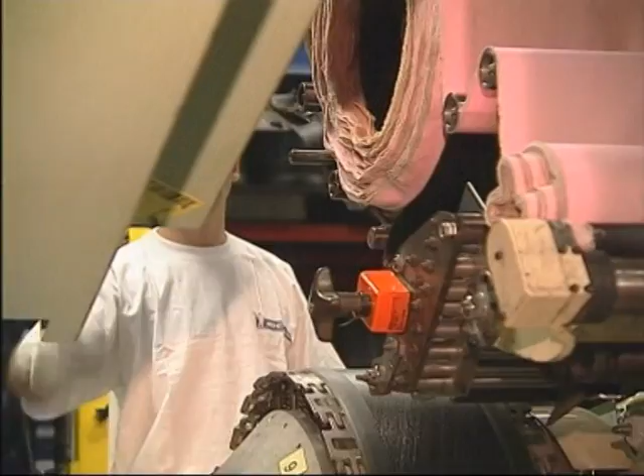A tyre is a complex assembly of many elements, implementing a wide variety of raw materials. The composition of the rubber compounds varies within a single tyre. Each compound is carefully developed to meet the requirements in terms of flexibility, resistance, grip, etc. Long lengths of metal and synthetic cable are also used.

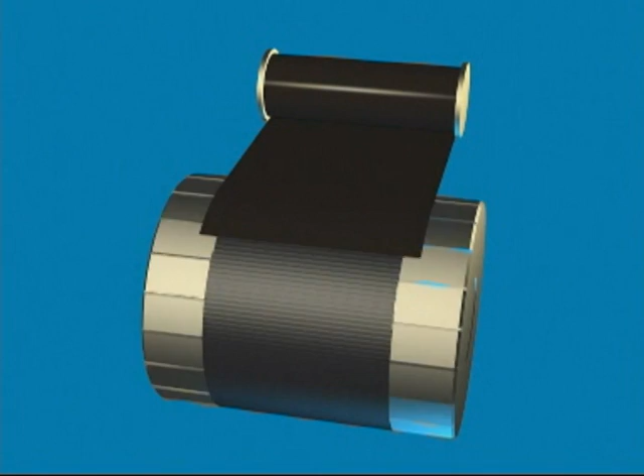Manufacture is performed on the drum, a rotating cylinder whose central flexible section can be inflated for reasons which we will see later. The first element applied to the drum is a sheet of airtight synthetic rubber. This layer replaces the inner tube in today's tyres.

In a second stage, a ply made of textile cords sheathed in rubber is then added. This network of cables will form a reinforcement radiating around the tyre. It is the radial carcass.

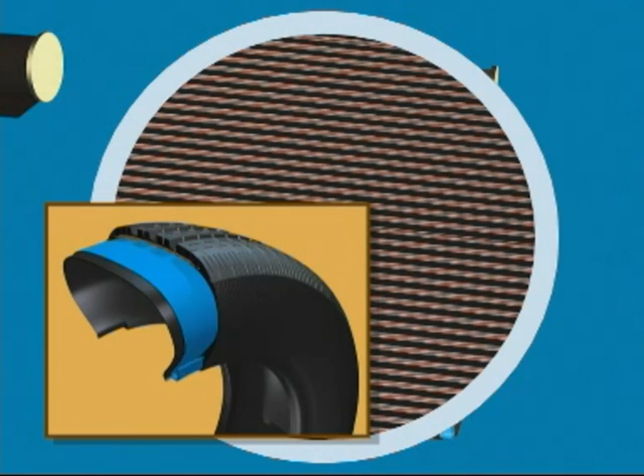Braced against strips of profiled rubber, two high-resistance metal cable hoops are installed. These are the bead wires. They will hold the tyre on the rim. The casing ply is folded over the beads to anchor it.

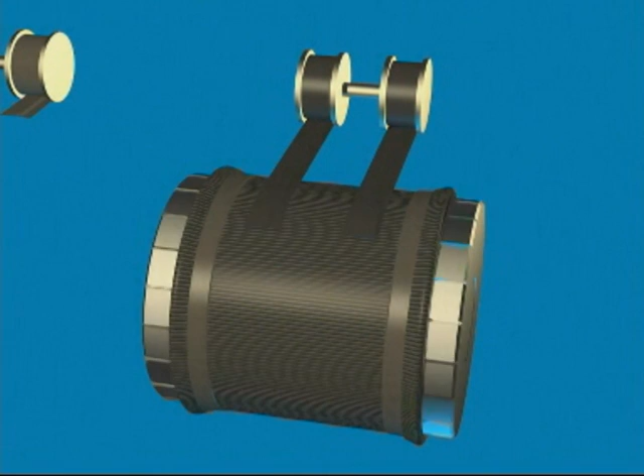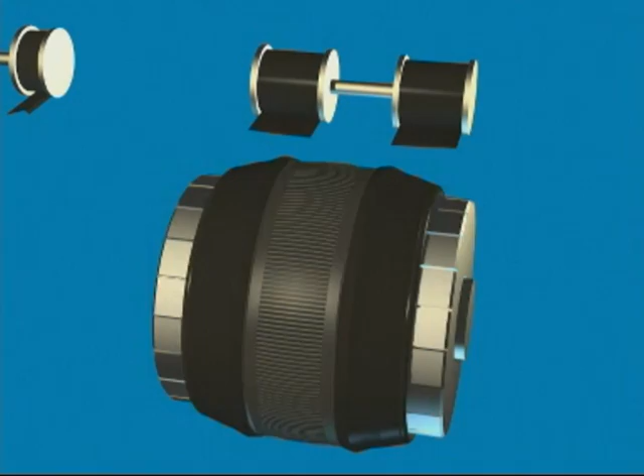Other elements are added. The sidewalls, made of flexible, resistant rubber, will protect the tyre from lateral damage. The tyre is then shaped by inflating the central section of the drum.

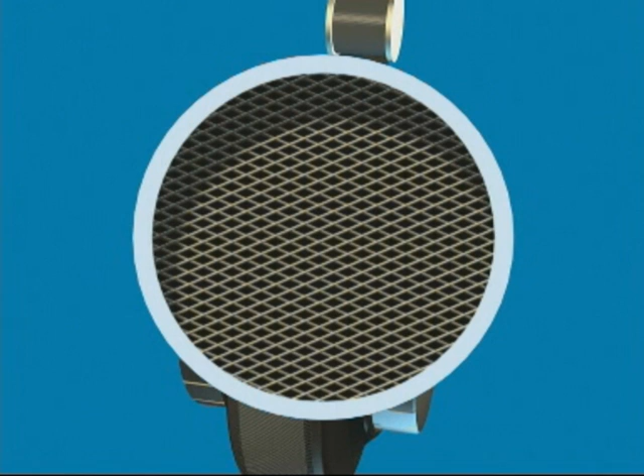Two plies are applied to the crown of the tyre. They are reinforced with metal wire arranged obliquely and, with the casing ply, form a network of triangles to limit the deformations of the tyre. Finally, the tread is fitted, the part of the tyre in contact with the ground.

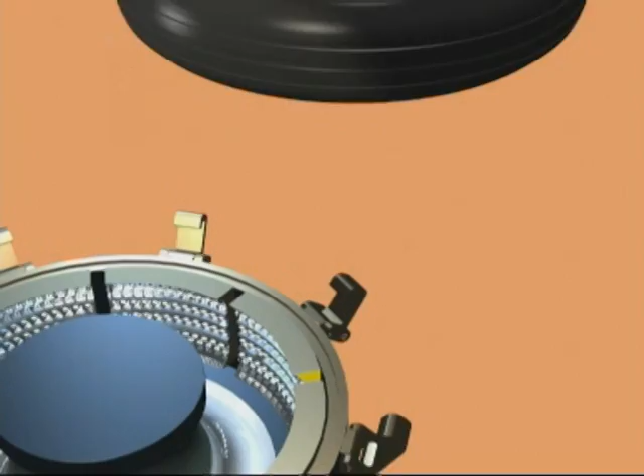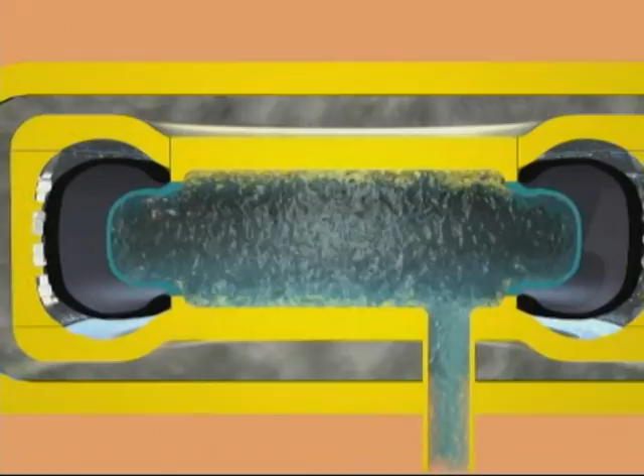The tyre blank can then be installed in the curing mould. In the centre, a bladder filled with pressurized hot water pushes the still malleable material to the base of the patterns engraved in the mould.

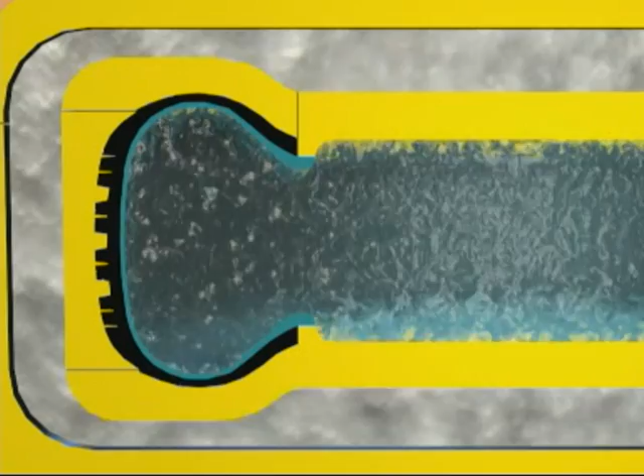The heat of the water and steam surrounding the mould will cause curing to begin. The rise in temperature causes vulcanization of the rubber. The sulfur incorporated into the rubber compounds forms bonds between the polymer chains. At this point, the rubber switches from a plastic state to an elastic state. When removed from the mould, the tyre has acquired its definitive form and properties.